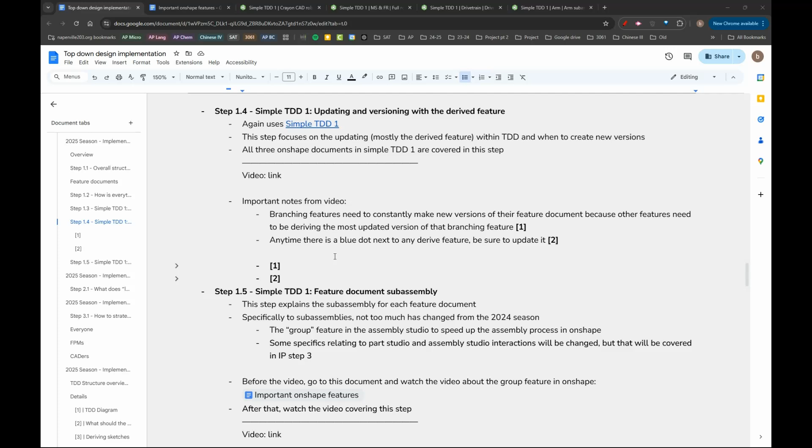Okay, so in this video we're going to go over versioning and updating. Not only with the derived feature, just updating versions in general. That's a big part of top-down design: the updating and versioning feature of it.

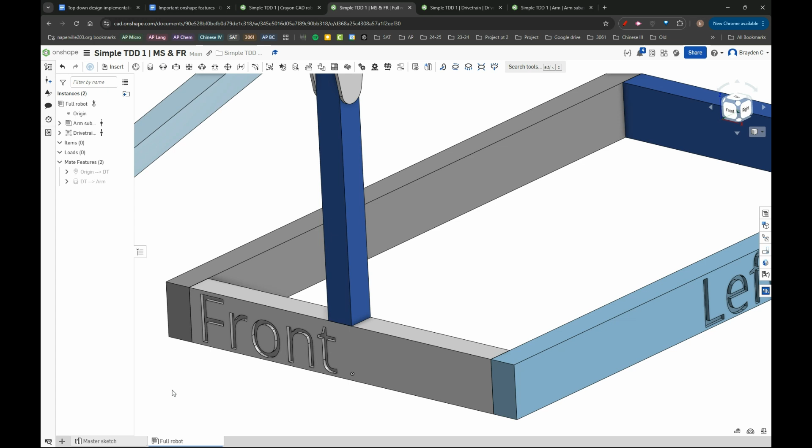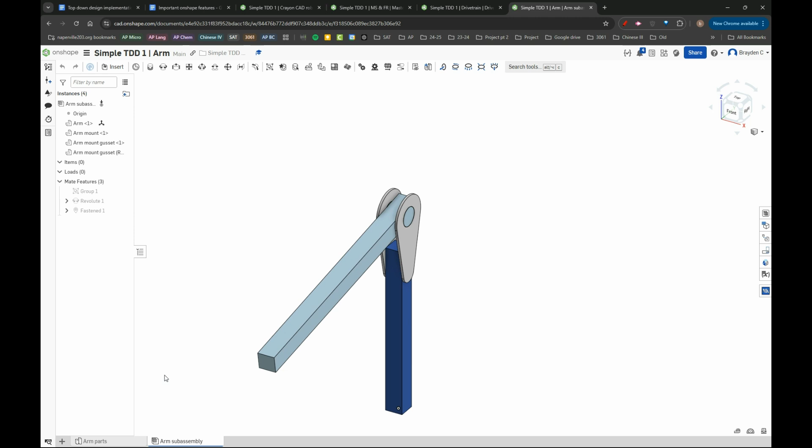Essentially what that means is if I make a change in the master sketch, let's say I move the arm to be almost vertical, it doesn't need to be perfect. That doesn't immediately update for any sketches, or any other features that are deriving the sketch. So arm would derive this sketch, but you'll notice our arm is still in this position, the original position.

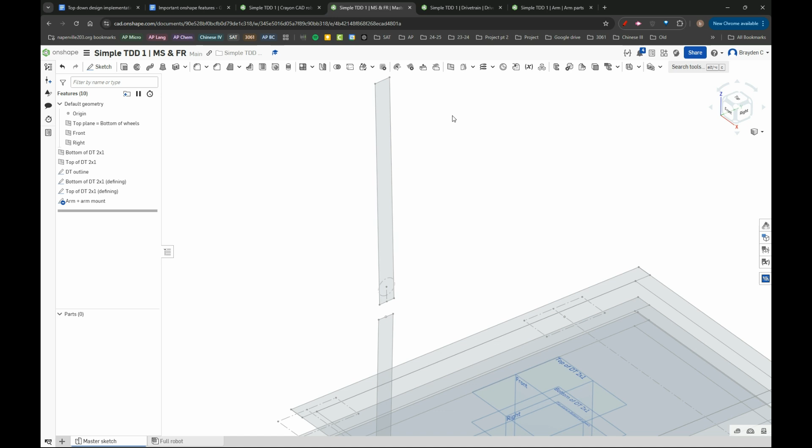And that's because a couple things need to happen. One, I have to make a new version of the master sketch—this only applies to the master sketch. I have to make a new version of this, and then you'll see a little blue dot. You click on the blue dot, update the version right here, update all, and then it becomes vertical.

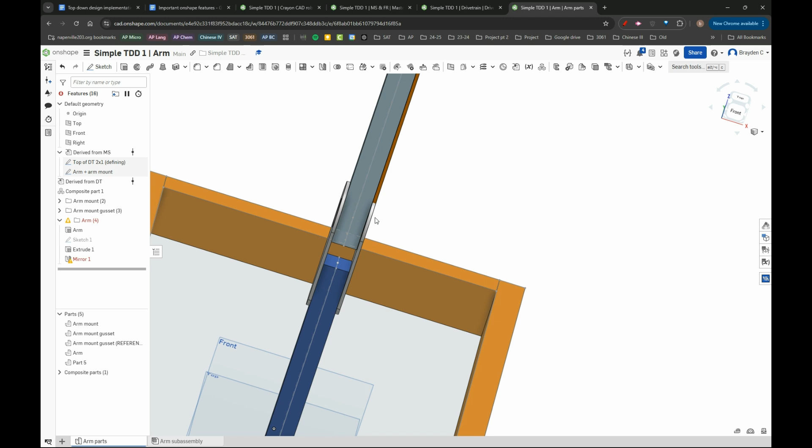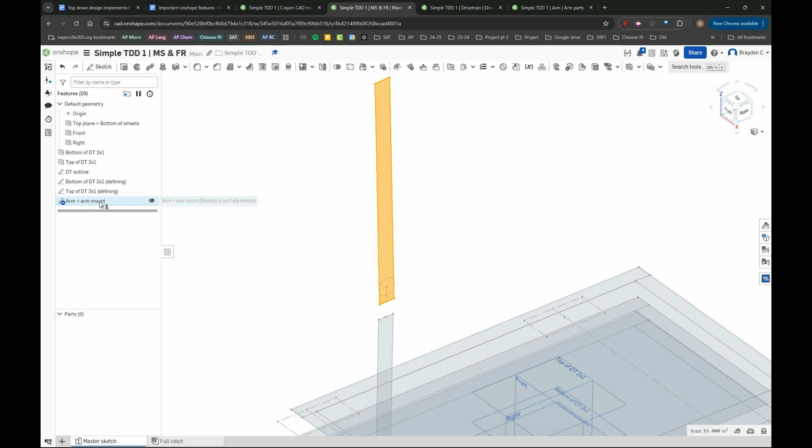What is going on with that? Huh, that's interesting. Hold on, some technical difficulties. What? Huh, okay, that is very new to me. I did not know that would happen. I guess it's a good lesson—if that does happen during season, tell me and we can fix that.

I think the reason is because of the original position. Let's wait a second, quickly do this, update—it should be fixed after this.

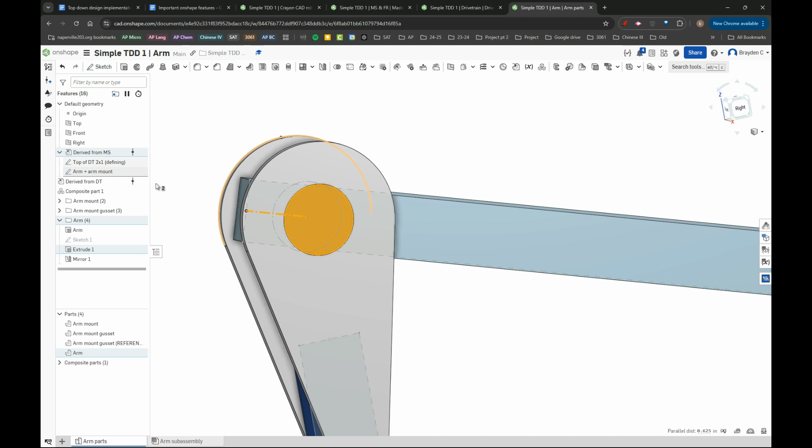So the reason that happened is because, if you look here, we referenced here and here, but in the upright position the problem was that in the same spot it would reference the entire arm itself. Don't worry about that too much—if that does happen, I can bug fix that with you guys.

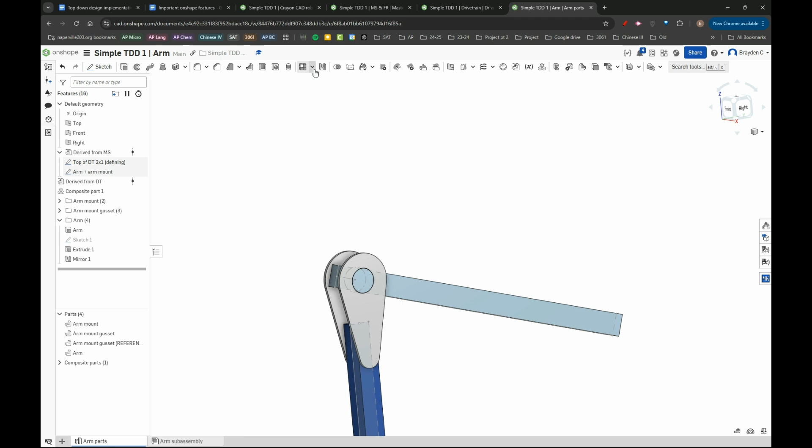Yeah, this is pretty cool to learn, cool to know.

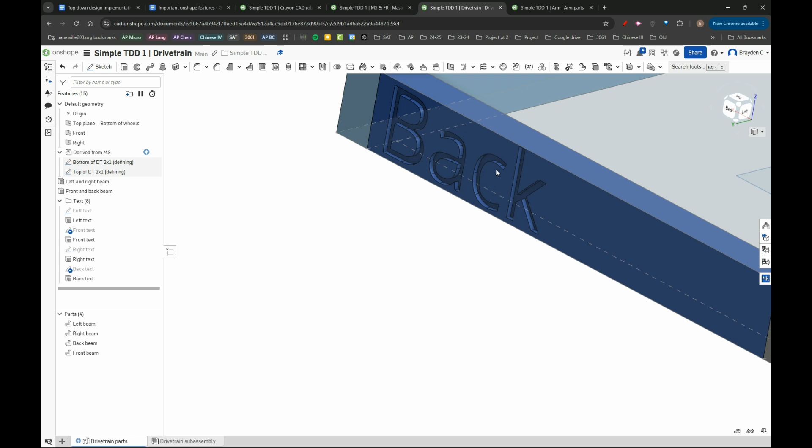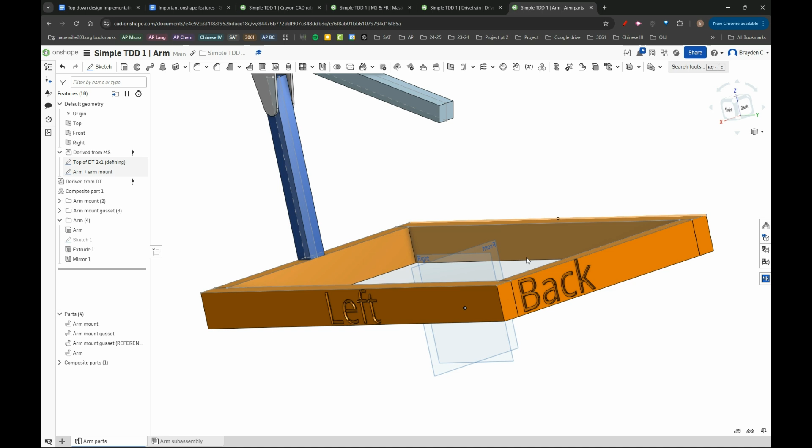Basically what this means is anytime you are working in a feature document, which is basically everyone, you always have to create a new version. You have to always click this to create. Always do this anytime you make a change.

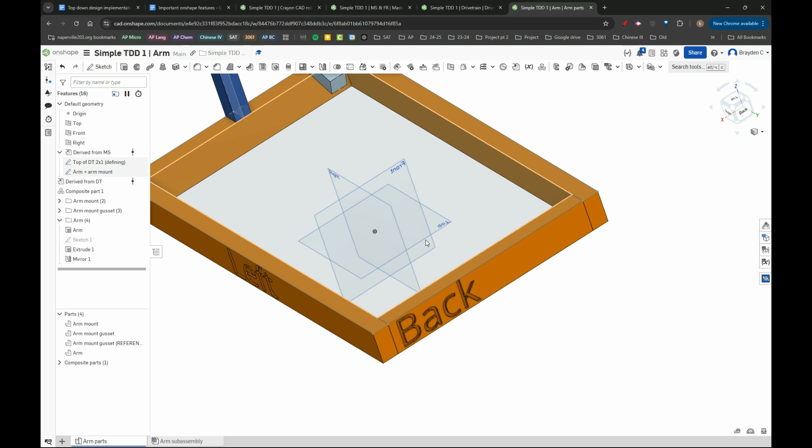That does not mean if I'm about to create another arm—that doesn't mean after I make a sketch I click and create a new version, or after an extrude I create a new version. It just means once you've made your entire change, create a new version. Every 10 minutes or so, creating a new version is probably fine, or if you're working on something a little longer, I think that's pretty much it.

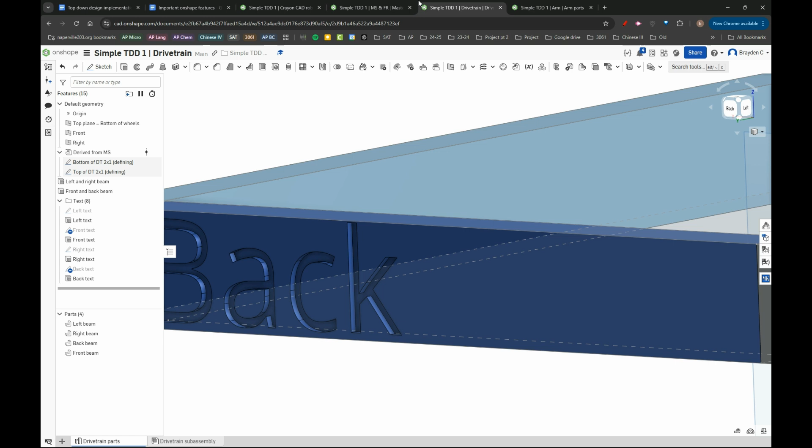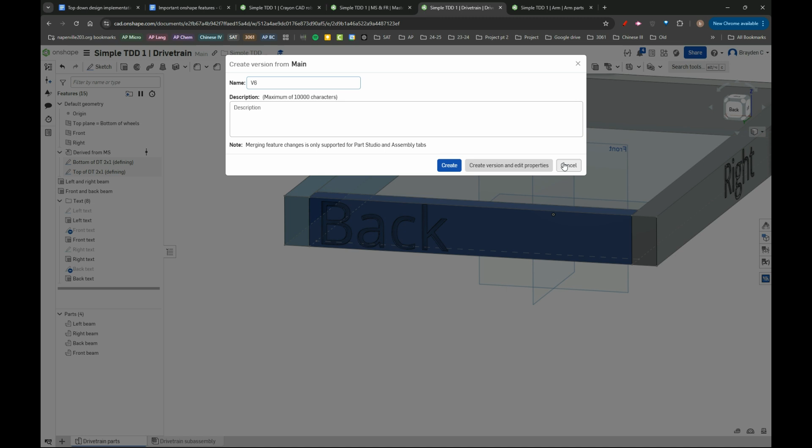There isn't too much else. Just remember, anytime you see that blue dot right here—I think it's this one—anytime you see this blue dot, always click it. Always click update all. Anytime you make a big change when you're working in a feature document, always click create version, so that everyone else can update their derived features. Yeah, that's pretty much it.